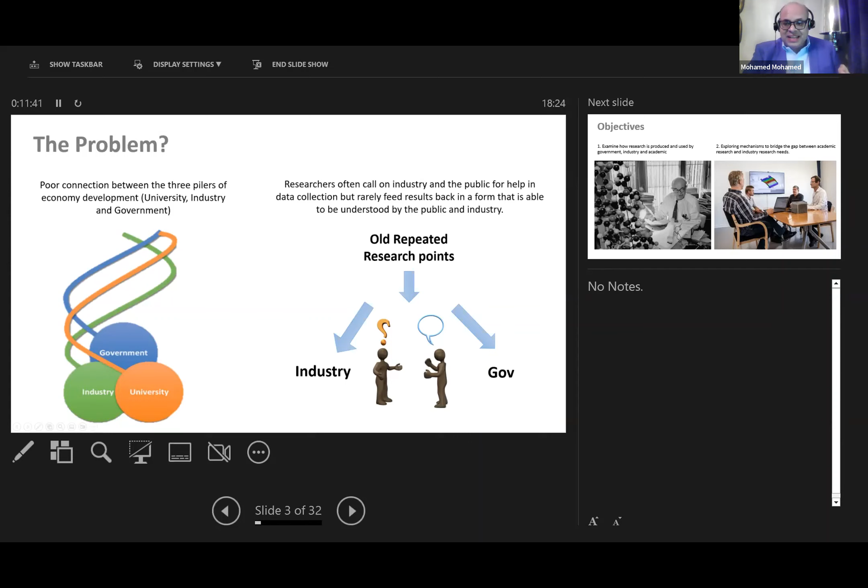It can help, can interpret the requirement to industry. This is a sequence. So the objective, what's the objective? When you're doing the research, you need to know how to do the research and how it will be used in government and industry. This is the main point.

When looking for research, you have to look for a point, don't look for a point that is repeated for a long time. As we agreed, I believe, that if you need to repeat another point from external sources, I don't like this, but it can be a learning process, not research.

And after that, you're exploring mechanism. You sit down with the people from industry, try to explain your product, your idea, your new service you can provide them. And you have to let them know, okay, with this service you will have a percentage of benefit, like percentage of cost increase, cost reduced, percentage of income, percentage of weight reduced, performance.

So you have to give numbers, not random numbers. Numbers come from the research output. That's it. So scientific research is research performed in a systematic and constructed scientific method, not random.

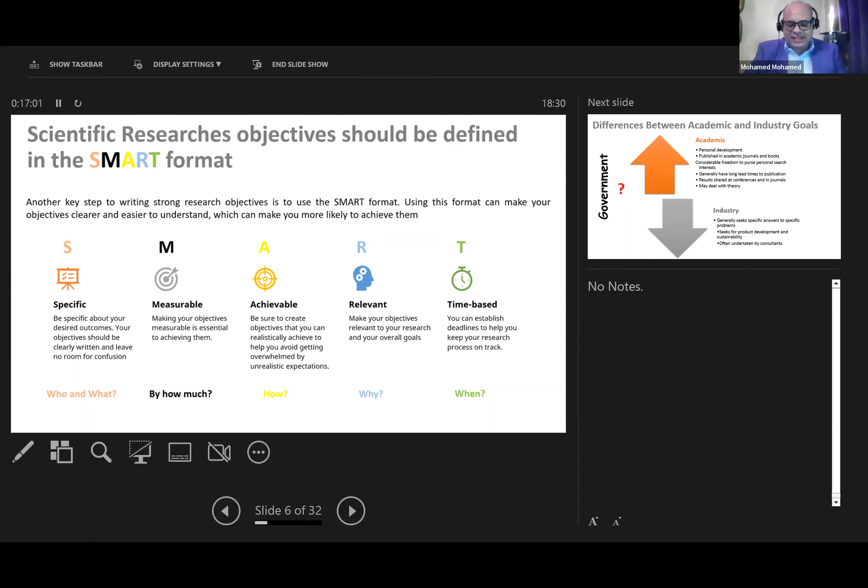We talk about research, from academic to industry. Each one has its own goal. For example, academic research, I'll be frank with you. What is the academic research objective, goal, or aim in its working? Personal development. I need to be a professor. Correct? Yes, and I need to be a dean of the college, president of the university. This is fantastic, no problem.

Published in academic journals. We are here in a conference, an international conference. So all of us are keen to attend this, do some papers, get published, raise your scale, raise your H index. This is important, to be honest. Generally, you have a long time for publication. We don't have that constraint; you are flexible in your work to determine, oh, I can do this, I can do this, I can do this.

Industry, no. Industry will say, I'm working as principal technical in an automotive manufacturing company in UK. So I'm an industrial man, and also academic, so I know the difference. Industry will say exactly, I don't care about your research, I need a specific solution to my problem. Do what you need to do. I'll give you an example.

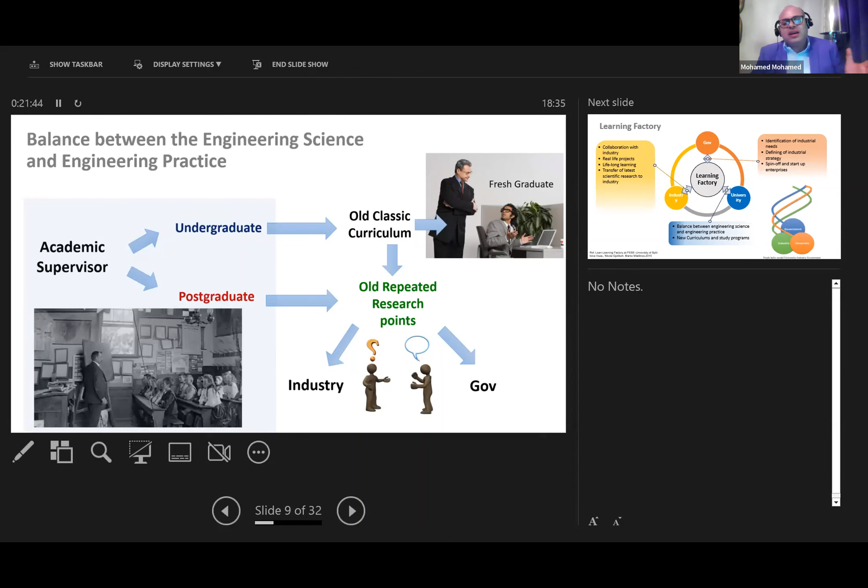And as I mentioned, this gives miscommunication between the government and industry. And you can see the fresh graduate is really poor - it's not, when I say poor, it's not a big problem, it's not a bad ticket for him, it's not bad, but it's a problem he has to deal with. So this is the learning factory we're talking about.

People think this - it's very famous actually, you can search it on the internet. People are searching, oh, we need to connect this. Okay, and instead of having a triple helix model, we should have a learning factory. So we have a learning association to connect all these three together.

So what does the university and government do? Identify the industrial need based on the strategy. They put the strategy, defining industrial strategy. And then industry says, oh okay, but I'm sorry, how can I do this? I'm an industry man, so I need a process, I need a new technique. So he has to come to the university.

And the university, to solve this, probably we need to have balance between the engineering science and the practice, and also develop it properly - we need to develop new curriculum and study programs. Why not? This happened in Imperial College and Cambridge - changing the curriculum. There is now, in 2 minutes I will let you know, there is a new course, new module, called lightweight technology material. This wasn't there before. No.

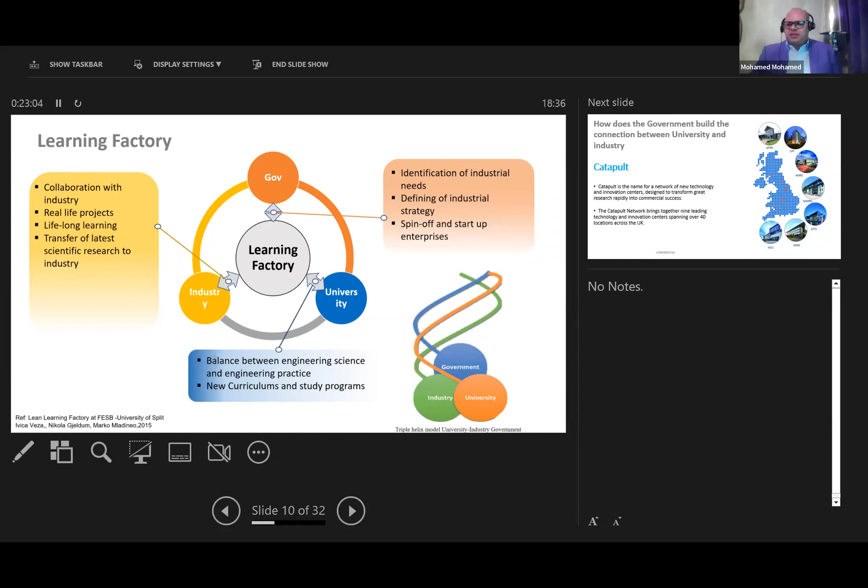Look at the role of the government. So in the UK, as I mentioned, no research can be left on a shelf - it has to have an objective and outcome to be implemented. So the government said, oh, I need to strengthen this, I need to add another push to transfer the research to the industry.

Look what they're thinking about that - they established a kind of Catapult Network. The Catapult Network has 9 centers: AFRC - advanced forming, composite, machining, and so on, digital manufacturing, nuclear, MTC. So they established dedicated, research-oriented centers for different manufacturing divisions, for example, and they put them all across the UK.

You can see they spread it out to all of the UK. There's one AFRC in Scotland, Newcastle, Birmingham, West Midlands, Cardiff. So they put all of these, and each one of them has a connection established by a university, like a spin-off.

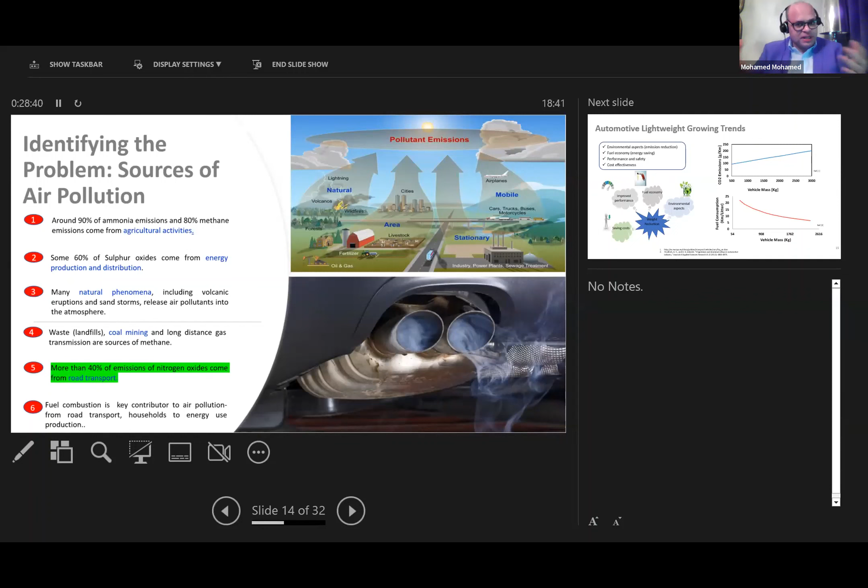So the researchers think there is a problem. The people, the government need to reduce emission, and the industry is asking the automotive manufacturer to reduce the weight of the car. It means they have to replace heavy metals with lightweight metals.

And they discover this: once the car increases, the emissions increase. And once the car increases, you cannot get more benefit from the fuel. So you can see vehicle mass increased, but kilometer per liter, you can have just a very, very small number.

So they think about this: weight reduction has a benefit, has a future, fuel economy, environment aspects, improved performance of the car, which is known, saving costs.

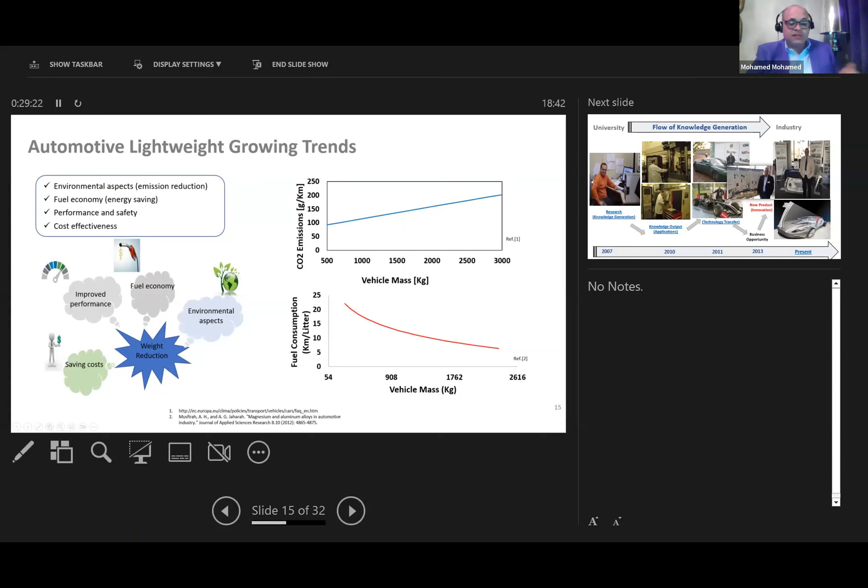And this is the flow, the flow of knowledge generation, starting from the concept, the research, university, until going to industry.

Apologize if I put some photos, I don't mean anything here, I'm not showing up, but just to show the flow of creating the knowledge until we have a new product.

So for example, starting here: research knowledge generation, you look into the office, read a lot about the process, how to form it, how to form it. So I need to know the knowledge about this material. I have a lot of hair here, but unfortunately now I lost it because I've been working very hard.

And then go to the lab, doing the experimental work, determine the process window to know if this process can be viable for small scale. Yes, we found it, small scale, working out, it's good.

The university sent me out as knowledge transfer, sent me out as industrial secondment, like 'iaara sinaiya'. I spent 1 year in a very, very old but really, really famous antique company called Lotus, Lotus car. I spent 1 year in the company to implement the first part, the process, in the first part.

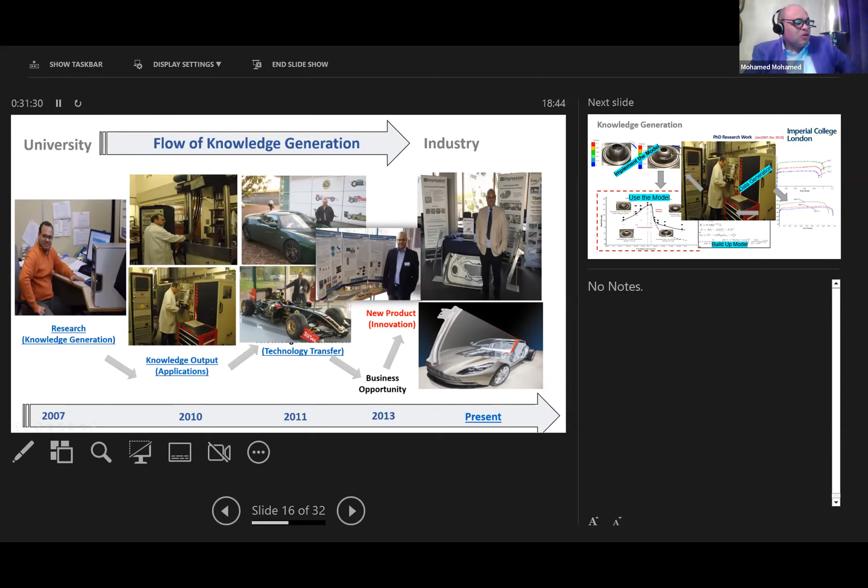So this is the flow. If you talk about research knowledge generation, if you break this down, here you go. This is the research, pure research. Doing tests,

creating a damage model, a viscoplastic damage model, testing, material testing, tensile test at different temperatures, different rates, determining the process window. This is the process window. I said, oh, here is the process window. This is the area. Speed, is this the speed we should be working on?

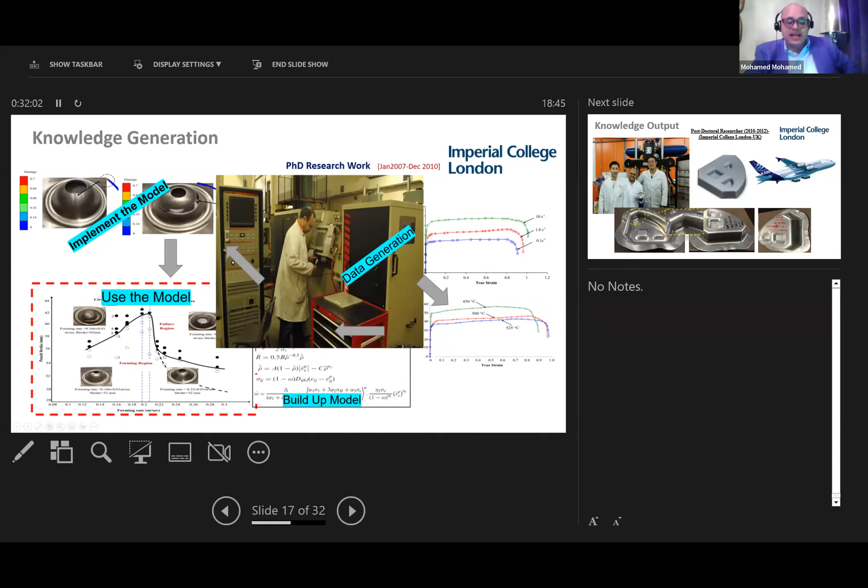Really? Yes. And then this is at Imperial Lab. Then we'll try with small scale.

The guys come to us and said, oh, can you do this in your process? We hear that you can have a knowledge in this process for aluminium. Can you do this? Okay, like us, it's called doing a stiffener.

And this part, actually, the customer was doing this part by machining. Imagine a big part, not small like this scale. A big part is machined down to this thickness. Imagine how much material is wasted. But you can see, we form it.

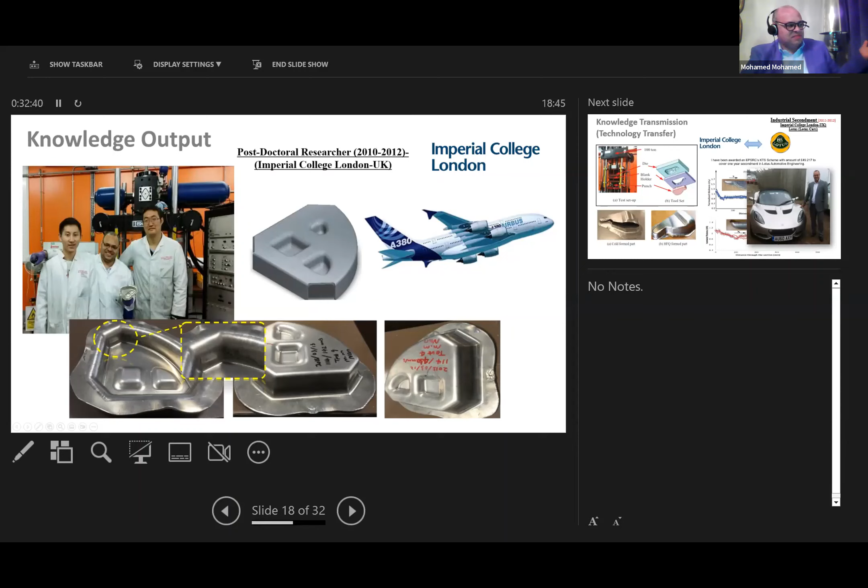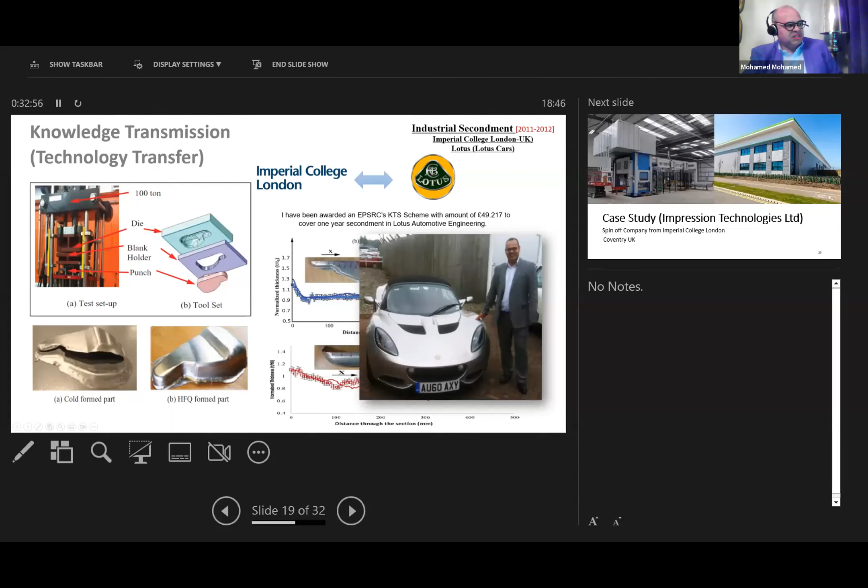And these two students here with me, working fine. We go to Lotus, do the process with the whole part. You can see if you form it with the previous method, splitting - it cannot be formed. But with this process, we form it successfully.

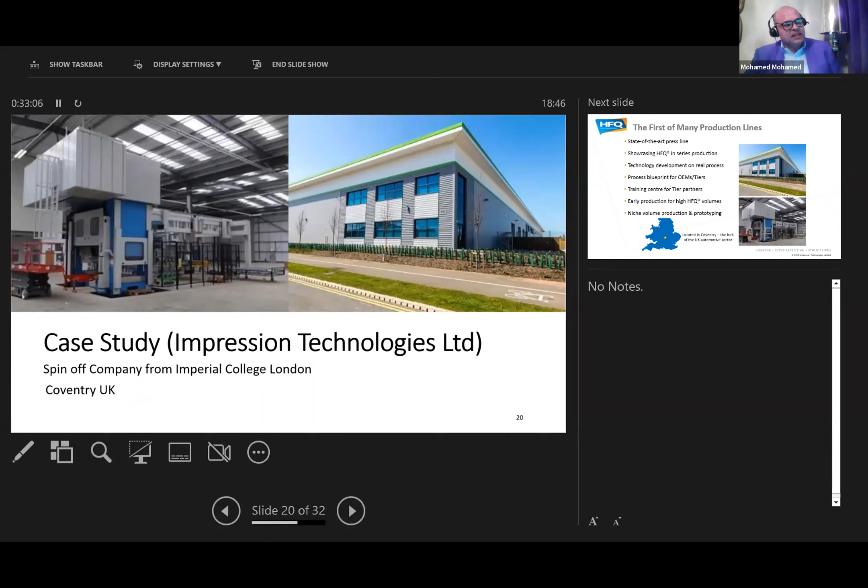So now we have a case study. We have this place, it's called Impression Technologies, and I'm a part of the team. It's a spin-off company from Imperial, as I mentioned, and this is in Coventry.

And we have now customers from automotive, aerospace, rail, mass transit. So we have cost reduction, mass reduction. People think about this - industrial people, very clever to think about these 3 points: cost reduction, mass reduction, design flexibility. Oh, really? You can achieve this? Oh yes, of course. Oh no, can we have a meeting?

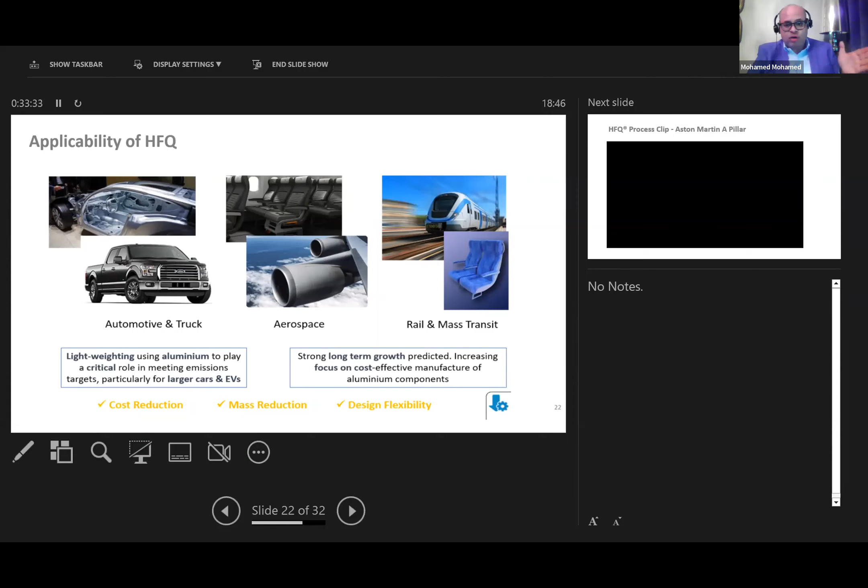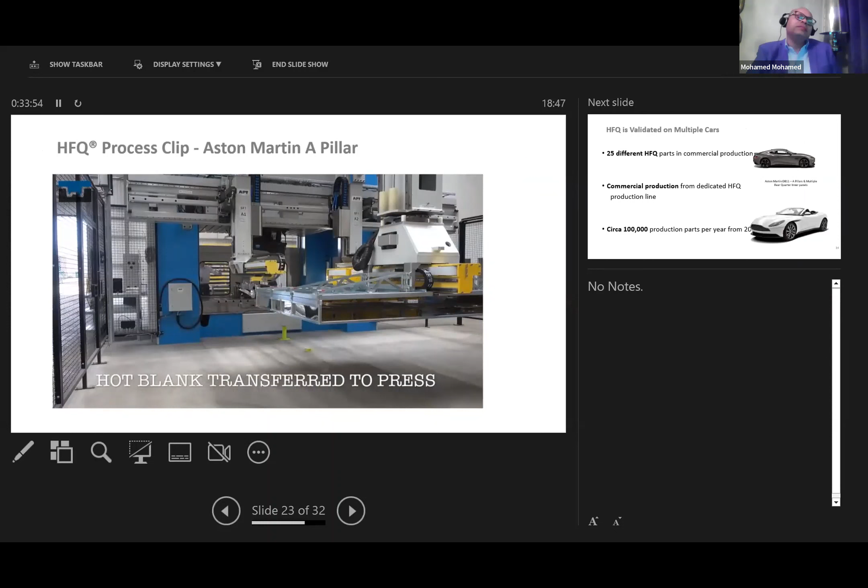That's it. And this is just a small video to show the process for the A pillar of the car. So he takes the blank from the furnace, heats the part, takes the robot, takes it from the blank, and then moves it quickly to the press for forming. Form it.

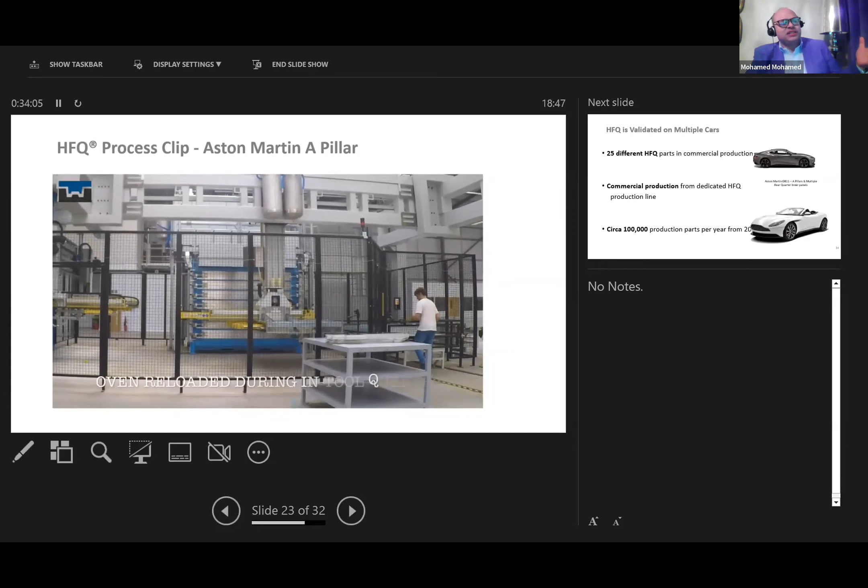Another part that's become mass production. This part is in the Aston Martin car. And we have many parts now. We have 25 different HFQ hot forming and cold die quench parts in the Aston Martin DB11.

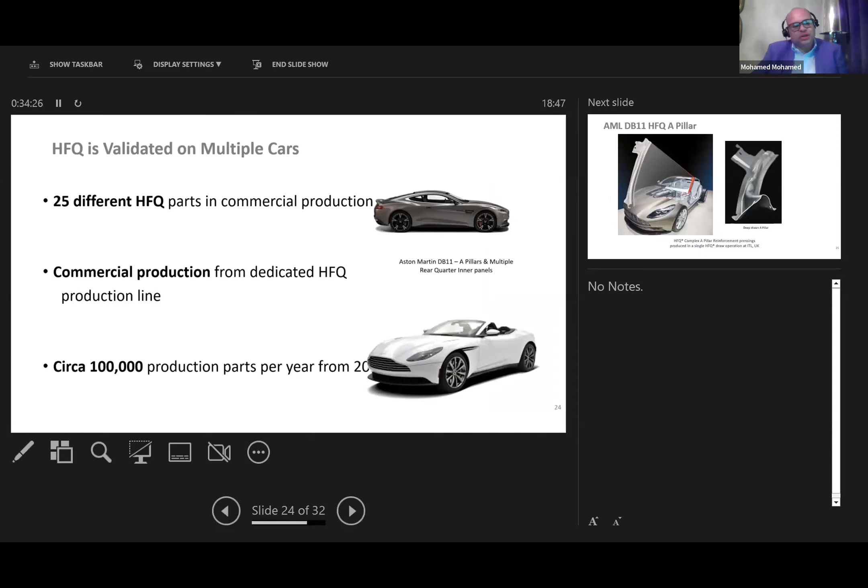We have a commercial production line, as I mentioned, in Coventry, in UK. Nearly 100,000 production parts per year in 2020, and now it's increased. So you can see the parts. Just as an example, you see the complexity of the structure.

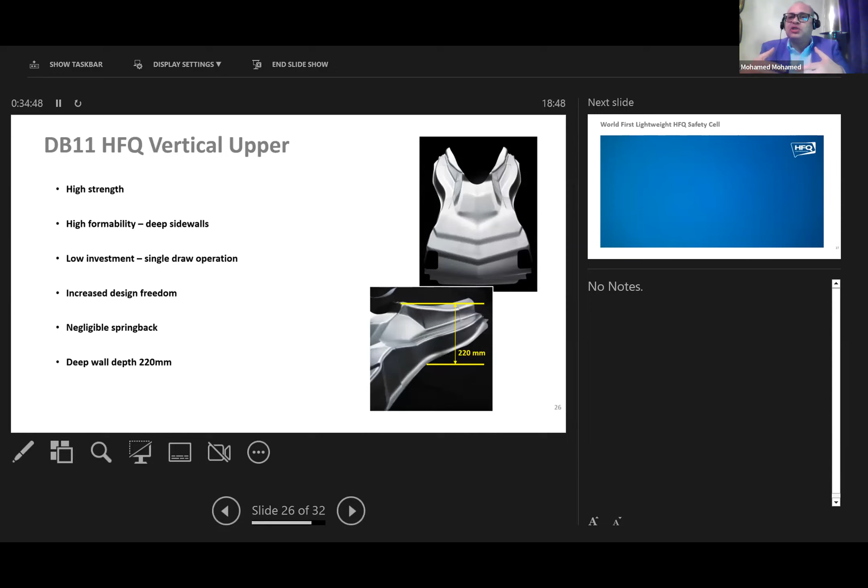The guys from automotive manufacturers, when you see this component like this, say oh, this is really important to us because it will integrate many parts together. So it means you eliminate the joining, eliminate other processes, eliminate tools.

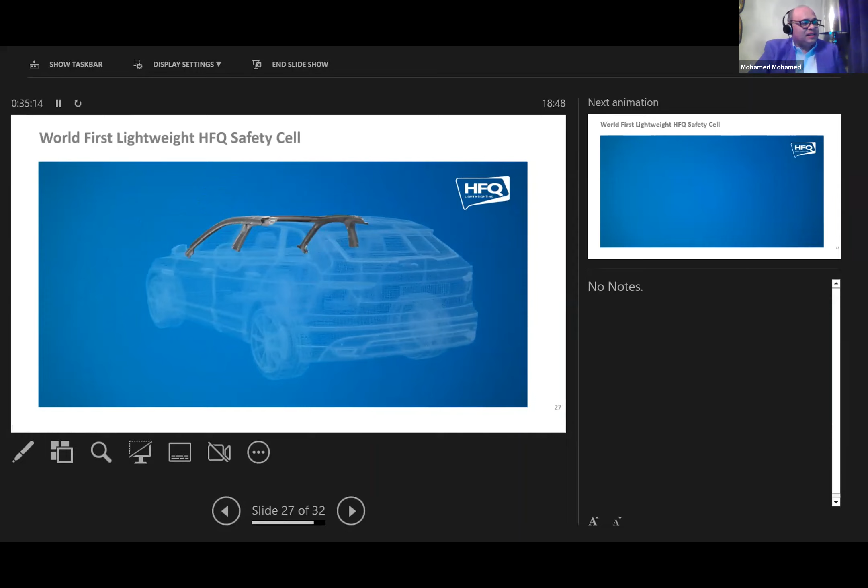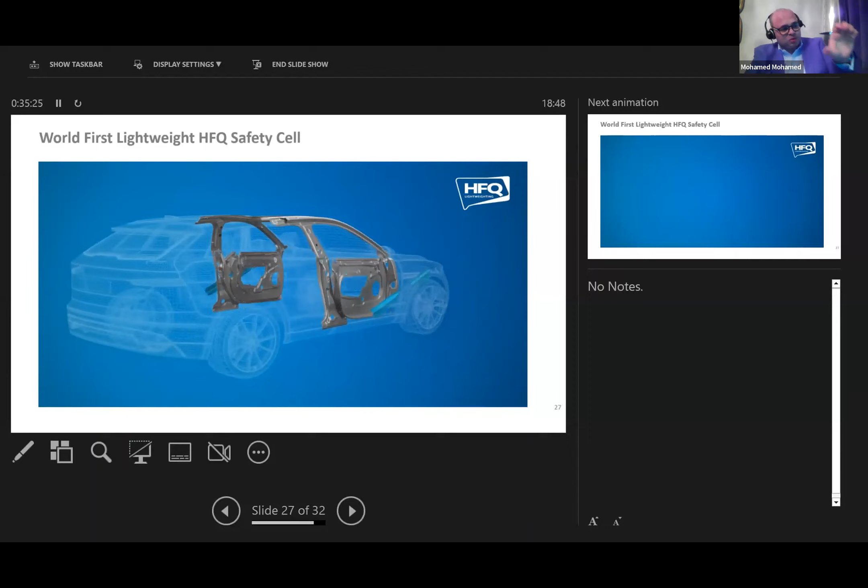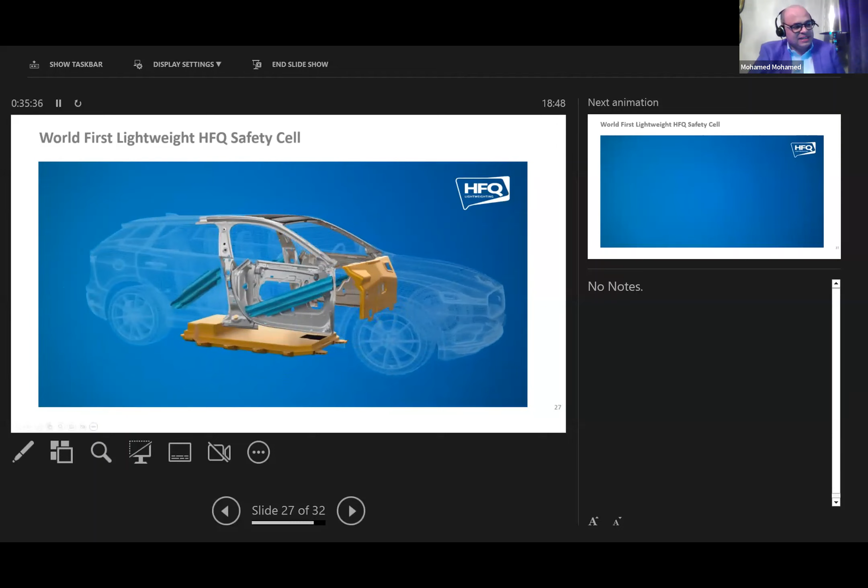The door comes from aluminium now. Even the door beam, the door beam is for crash. Yes. And the dashboard, this is to protect the driver. And recently for electric cars, we're doing the battery as well.

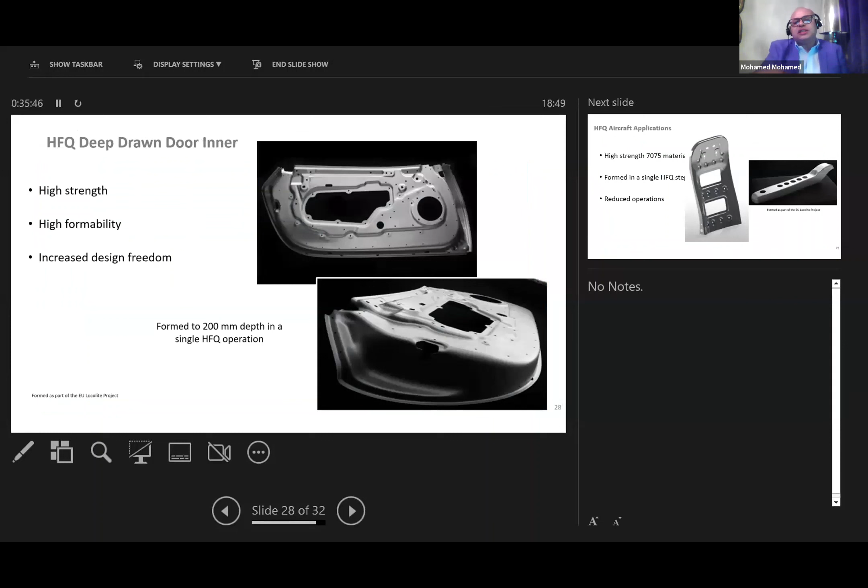So I'm not advertising my work here. I'm just telling you what is the technology, and how it is transferred from university to industry.

Last slide here - after that, we have partners. We sell the license. We have a line in Germany, China, US. So I'm traveling to all these partners to train them about the process. I just came from Germany. Next month, I will be in the States. So we train the people about the new technology.

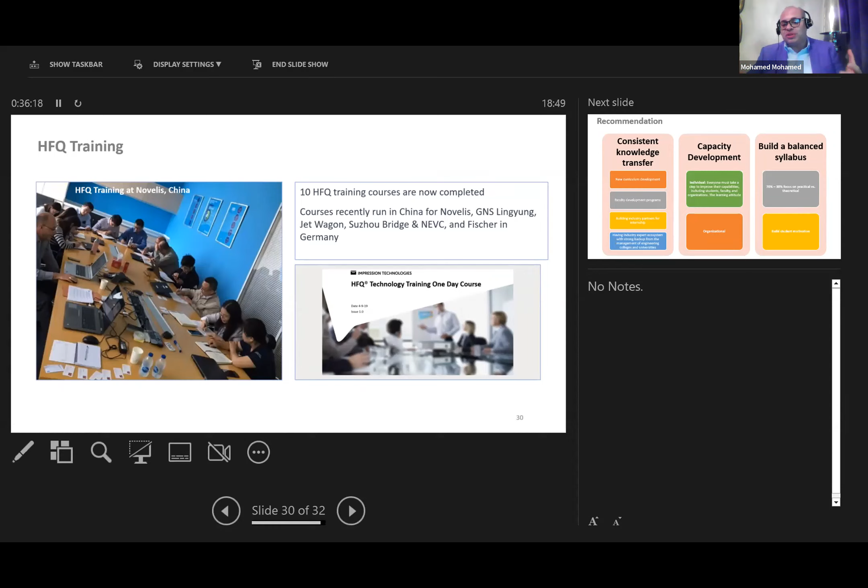Okay, I think I finish, and I hope I can give you more, because it's a big topic. It takes a long time to talk about it. Yeah, but I'm constrained with the time, and thank you so much. And I'm happy for any questions. Thank you.